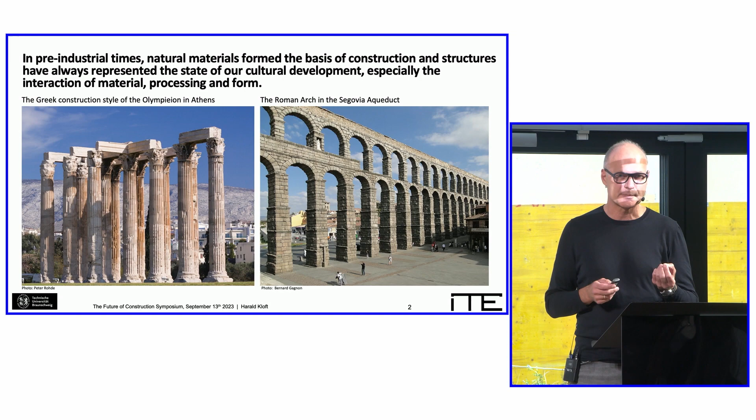So for me, it's always important not to step back, but to look back. And here you see two ancient buildings. In pre-industrial times, natural materials formed the basis for construction, and structures have always represented the state of our cultural development. So both buildings here represent, for their respective epoch, the unity of material, process, and form.

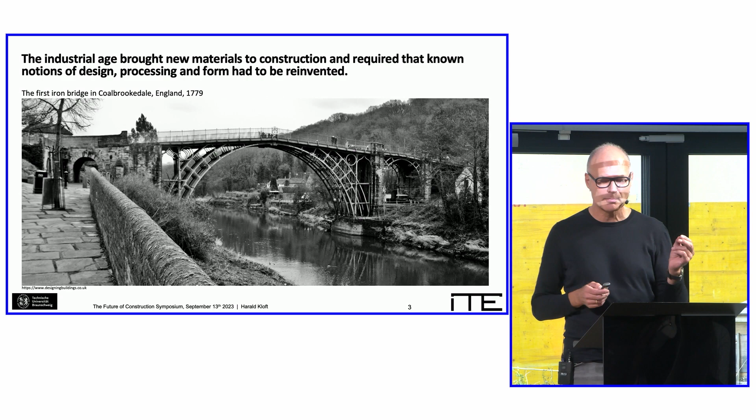And so this was for a long time, but then with industrialization we got new materials, and new materials also required that known notions of design, processing, and form had to be reinvented. Getting knowledge of material, process, and form is a process of development, as you see here with the first iron bridge in Coalbrookdale, whose form was still of a stone bridge, but without stones.

Infrastructure construction was then the birth of civil engineering, and the materials steel and concrete became the drivers of innovation in construction within the industrial age. Continuous research and development gradually resulted in formally impressive and structurally efficient concrete bridges, like here the Firth of Forth Bridge in Scotland, or the Salginatobel Bridge in Switzerland.

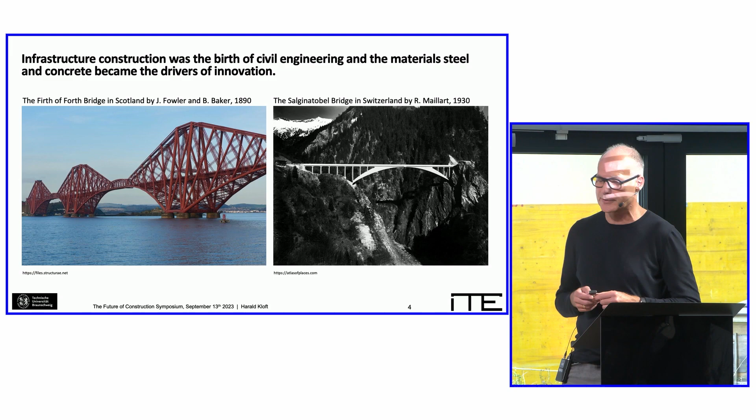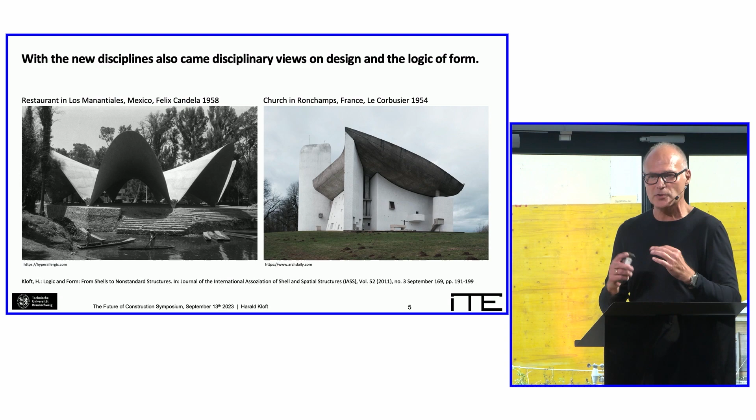With the new logic of form and with the new disciplines also came disciplinary views on design. Here you see two iconic buildings from the 1950s, from Le Corbusier and from Felix Candela. Both represent completely different ideas from the engineering and architectural point of view of how you design with concrete. One is a really efficient, minimized concrete structure. The other is much more coming from a spatial idea of how material could be arranged.

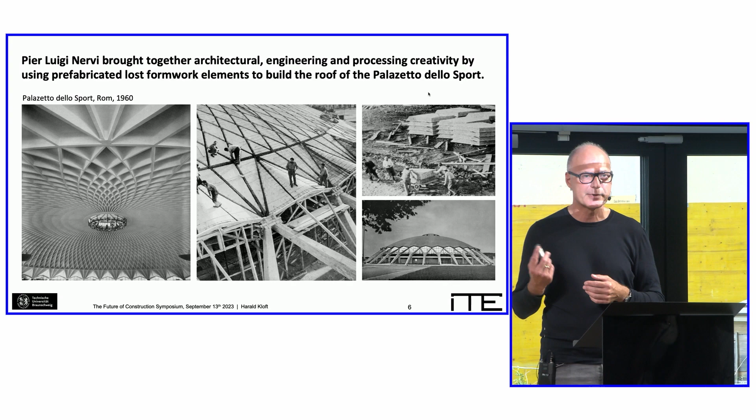Pier Luigi Nervi overcame disciplinary thinking and brought together architecture, engineering, and processing by using prefabricated lost formwork elements to build the roof of the Palazzetto dello Sport in just 30 days.

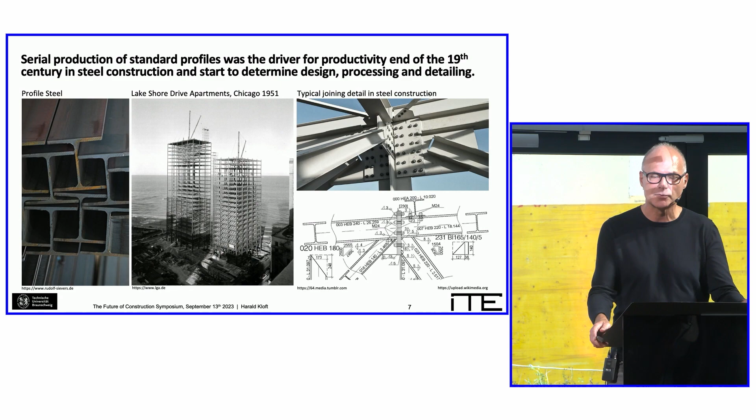Already at the end of the 19th century, in steel construction, the standardized series production of profiles started to determine the forms and construction methods, as well as the design and joining of the components, like you see here. As a consequence, steel design today is more geometric planning than material-efficient forming.

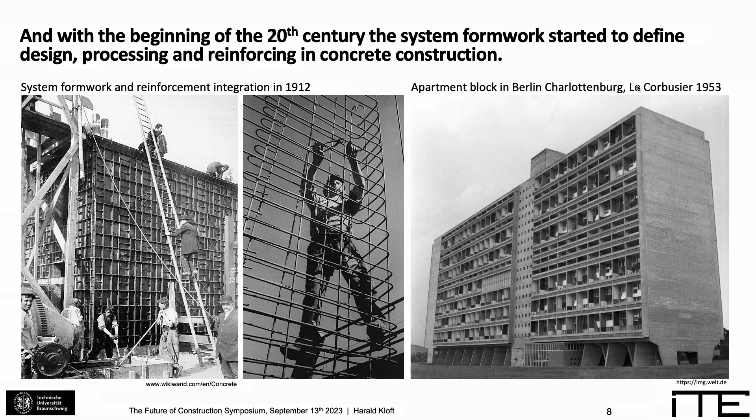And with the beginning of the 20th century, in concrete construction, the two-dimensional system formwork and the planar reinforcement grids started to limit the geometric form and material efficiency. So the resulting mass-intensive geometrical plane structures still shape our idea of concrete buildings today.

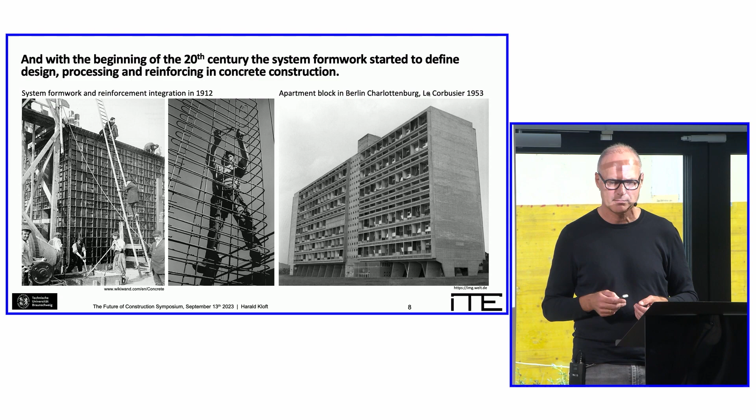As a result, industrialization has led to open material flows in construction, and is now a major contributor to today's environmental impact.

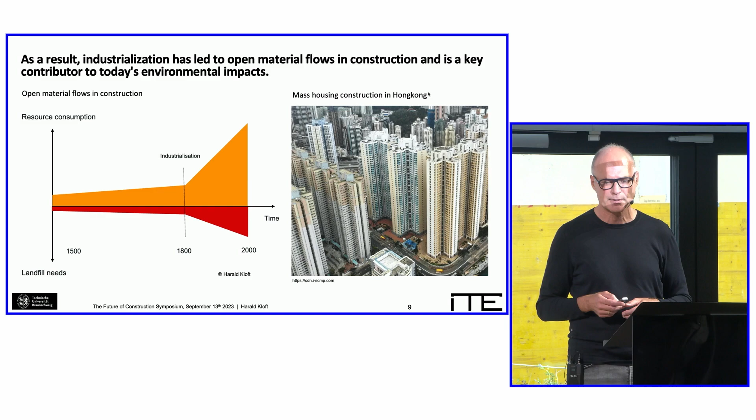Niklas Maak, a writer for the Frankfurter Allgemeine Sonntagszeitung, wrote an article about the paradox of building in times of climate change. He addresses the fact that the construction sector, as we heard before from the minister, is responsible for around 50% of the world's resource consumption and around 11% of CO2 emissions.

But we need to keep on going with construction, in building as well as infrastructure. So the question of the future is how we can build for more people with less material and fewer emissions. This is really dramatic, keep this always in your mind: just 80 years, coming from 2.5 billion to 8 billion people where we are now. 80 years.

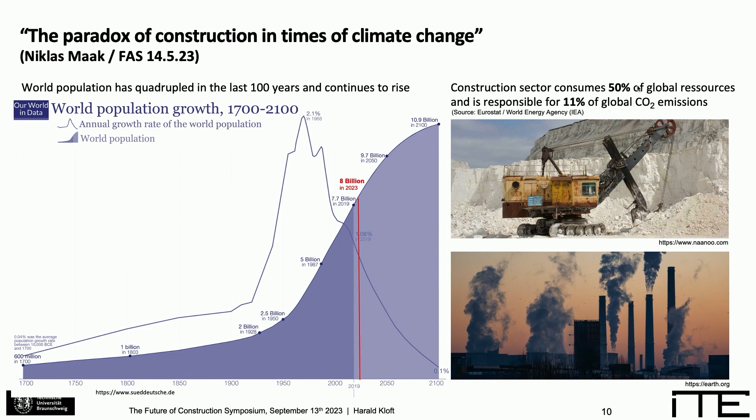At the transition from the industrial to the digital age, we need a new logic of form that is much more based on the convergence of material and manufacturing processes and uses the possibilities of digital tools, with the goal of circularity.

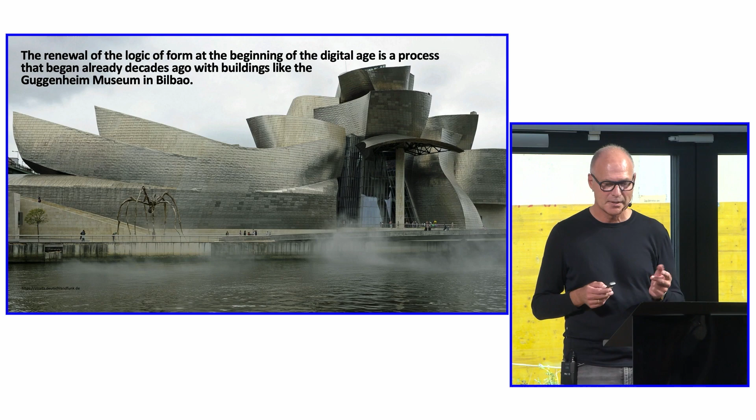So in my opinion, this renewal of the logic of form is itself a process, like at the beginning of the industrial age. And it already began decades ago with the realization of such fantastic buildings like the Guggenheim Museum in Bilbao.

Norman already mentioned that I had the luck at the turn of the millennium to be a project leader at the office of Bollinger & Grohmann and was involved in the realization of these unique freeform architectures. Our question at that time was always how do we get the industrial semi-finished products into those forms delivered by the architects. Digitalization was also at that time the key for this. But we were producing a lot of waste, and the processes were anything but economical.

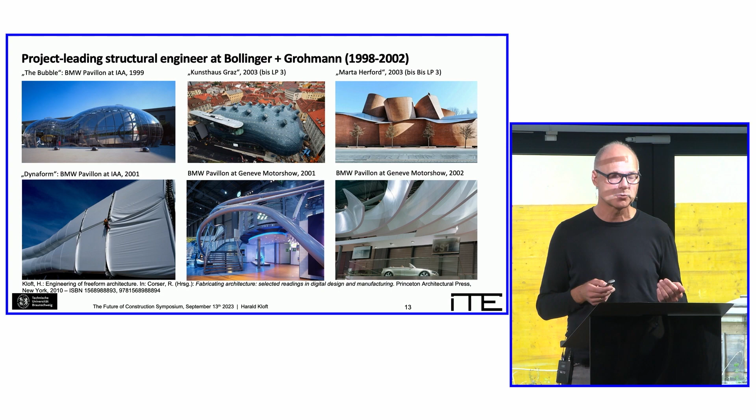But finally, they opened my door to digitalization, and that is the basis up to today of my knowledge. Where we have to go, I think what is really important is that in the digital age, we are clear that data are the key. Data are the basis for circularity, and they get controlled by software and hardware.

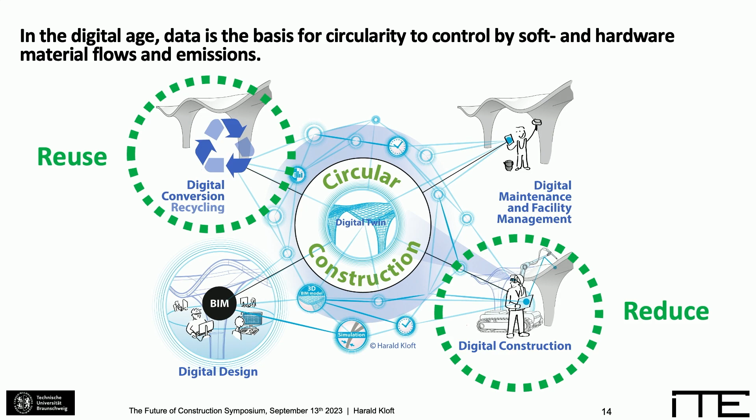And in the software area, there is already a lot of ongoing innovation. We heard about BIM, building information modeling, but also in facility management. So in design and facility management, there is a lot of ongoing things. But we lack really here on the construction side with our traditional technologies, and also in the question of how we deconstruct our buildings.

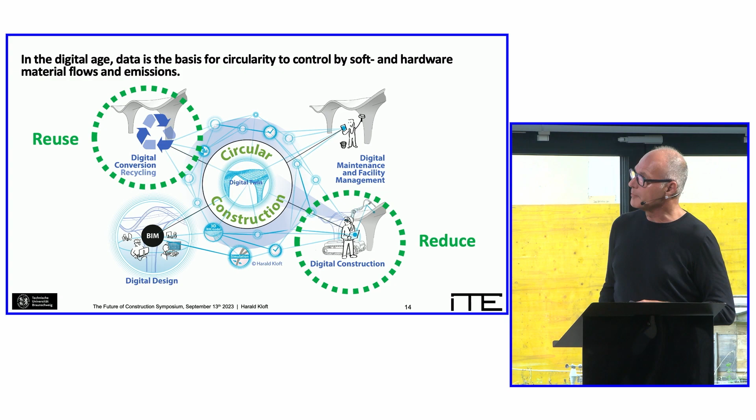There's less time now, just 15 minutes, so I will focus on a concept of how we have to build new, because I'm also convinced we have to build new. But it's also important how we reuse and recycle the materials we already have in the existing building stock.

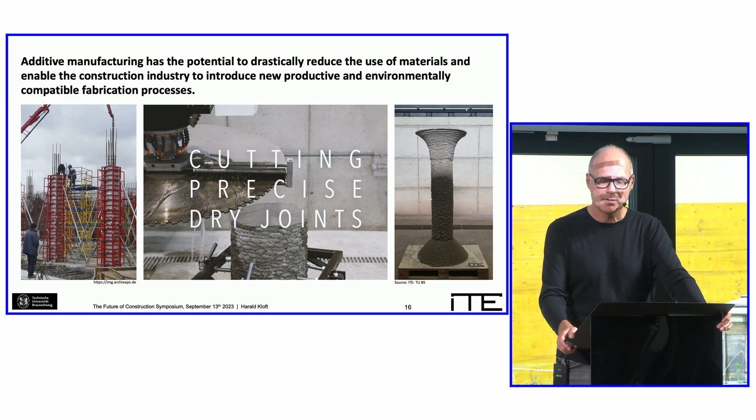So now, 20 years later, after this period of freeform architecture, in my opinion, the technology of additive manufacturing offers a paradigm shift in construction. Why? Because additive manufacturing is a layer-by-layer build-up of the components in a three-dimensional way.

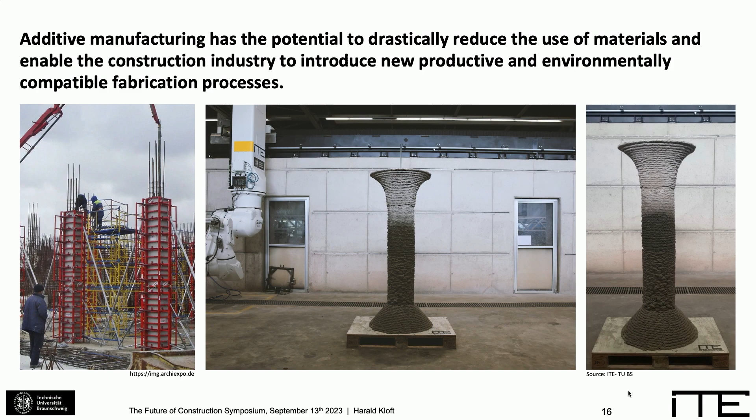So we don't need formwork, and also industrial pre-processes or complex adaptation of semi-finished products like we had in the freeform architectures are not required. So material and manufacturing process form a unit.

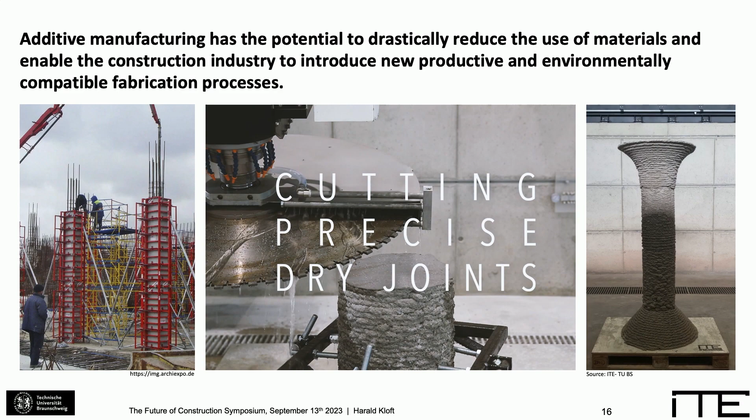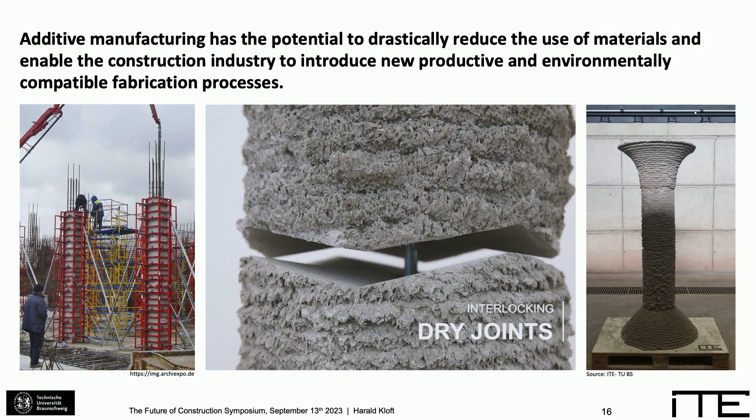And second, additive manufacturing processes are digitally controlled. That means they are enabled to get connected by data with design and facility management, so you can integrate this whole thinking on digitalization in a circular economy. And third, we have the freedom of form with additive manufacturing to create new scope for renewing the logic of form.

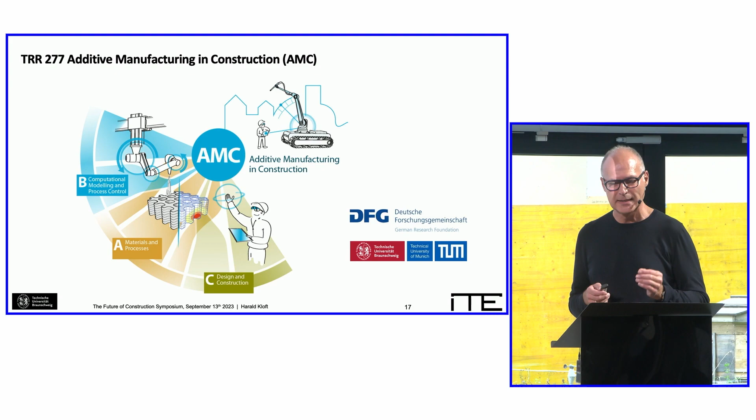TU Braunschweig and TU Munich already recognized the signs of the times at an early stage, and with the TRR 277, we started at the beginning of 2020 to fundamentally research the technology of additive manufacturing in construction across materials and processes.

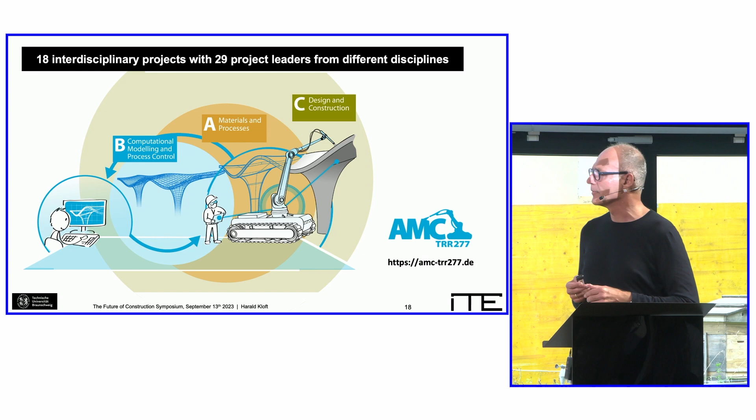29 project leaders are researching the relationship between material, processes, and form in 18 projects. All individual projects are very experimental in their methodology and require highly interdisciplinary collaboration between scientists from civil engineering, mechanical engineering, and also architecture.

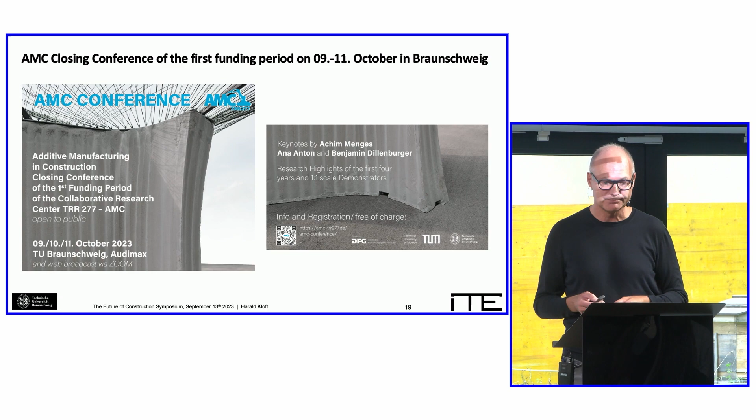Maybe we can reduce the noise a little bit, sorry.

So there is not enough time to go into all the activities in the TRR, but I'd like to present some of the things, especially those we do at the ITE.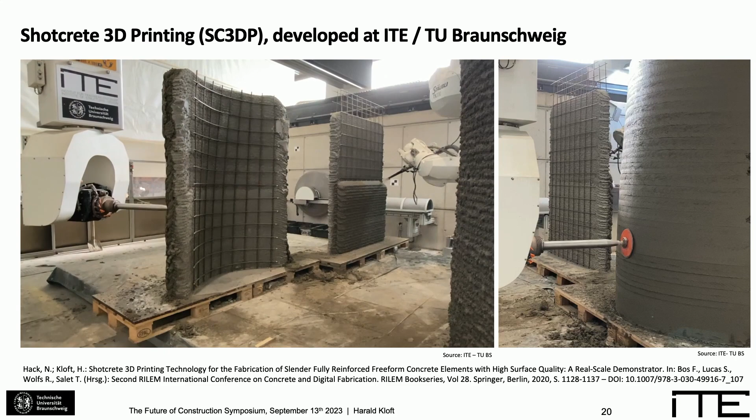So since 2016, we are continuously developing the so-called shotcrete 3D printing method, a deposition method where the matrix is accelerated just before the nozzle by adding compressed air and admixtures. This two-component process creates a very good bond across the layers and enables the imprinting, like you see here, of the reinforcement.

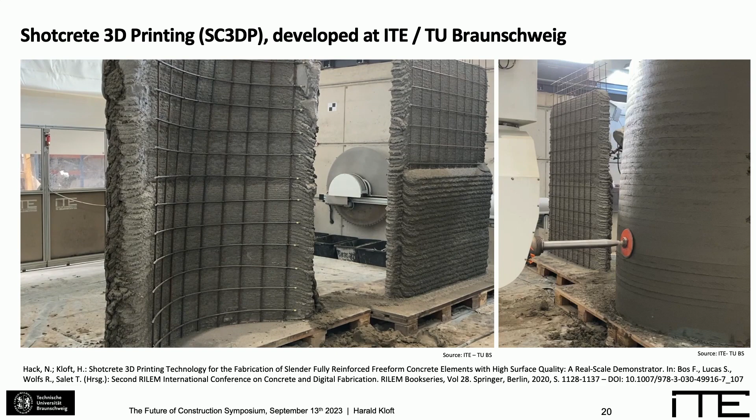Here you can see some of the form-optimized components in a one-to-one scale, which we have manufactured with a degree of freedom of the robotic facility. You will find them also well published.

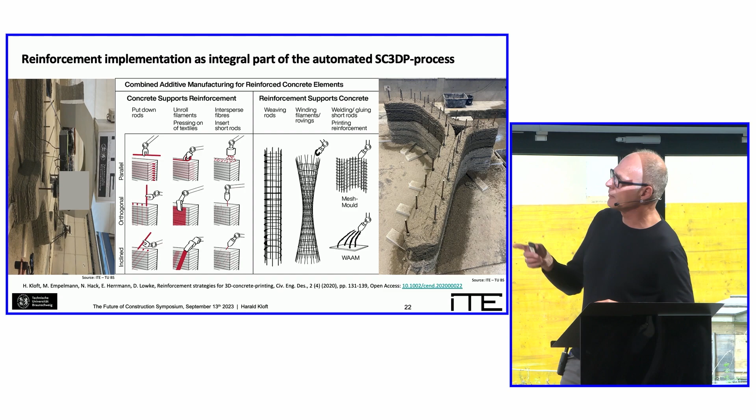One crucial point for the efficiency of load-bearing components is, of course, reinforcement integration. Here, through combined automated processes of 3D printing and reinforcement integration, completely new strategies are possible, like you see here.

Maybe if you turn your head, you can see the insertion of short rebars.

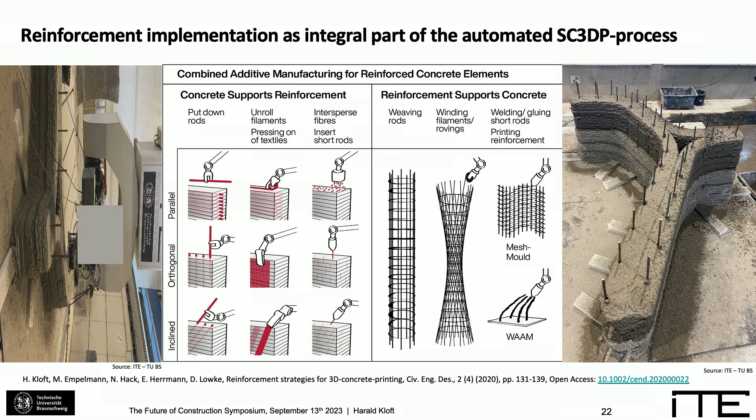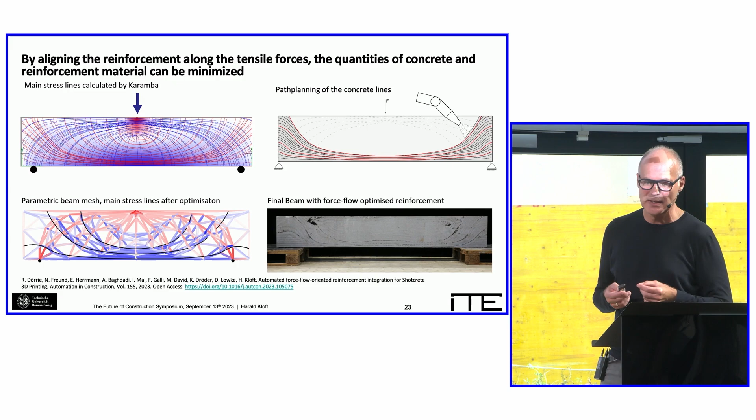The efficiency from an engineering point of view lies in the merging of design and manufacturing as an interactive process. Here you can see the possibility of arranging the reinforcement along the tensile force lines by matching the concrete paths to the reinforcement integration.

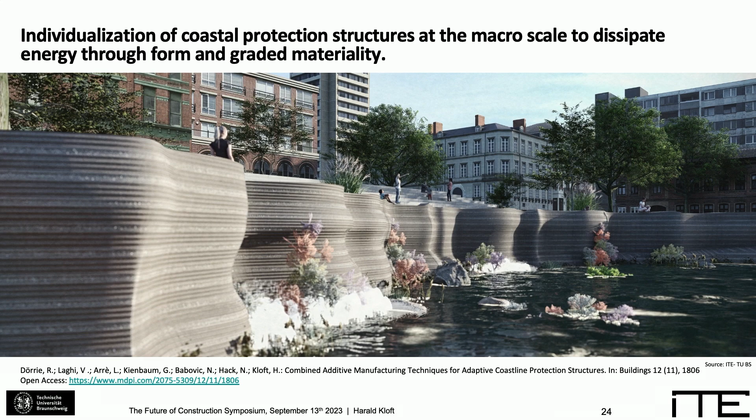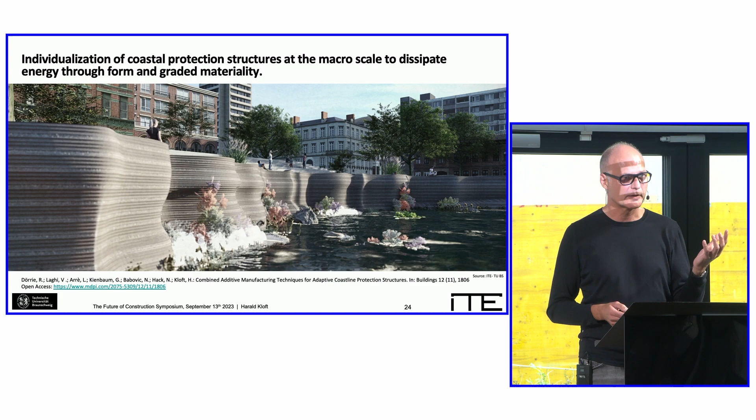But for us it is very important not just to focus on small details in fundamental research. It's also important to look for applications where a new logic of form is ideally suited. We can of course 3D print houses, but 3D printed houses are not, in terms of what 3D printing can do, a new logic of form. So this is what we have to really aim for.

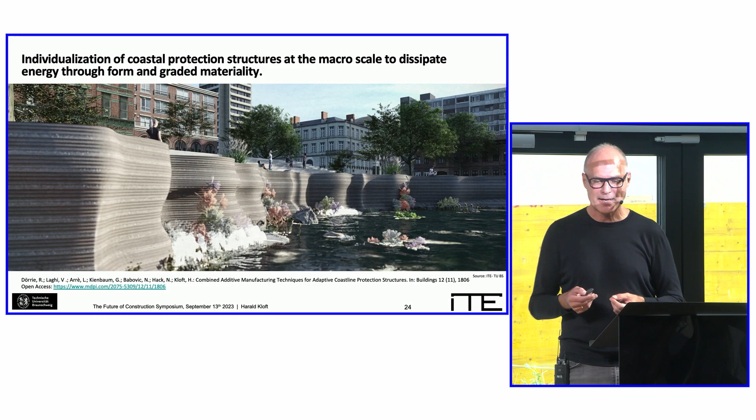For example, in coastal protection, highly individualized shaping and material grading can be based on local conditions and wave dynamics to dissipate energy, not just working as resistance by putting masses there, like we do now. So this is a mind gap in thinking.

Also, 3D printing with concrete does not mean by itself just thinking in terms of areas and volumes. At TU Braunschweig, together the ITE with iBMB, Dirk Lowke, we have recently also developed a completely new 3D printing process for concrete, where we put the matrix into a fluid in a dimensionally stable manner, making particularly filigrane concrete possible. The lightweight bridge shown here on the left, also in cooperation with Pierluigi D'Acunto and Ole Ohlbrock, gives the first impression of our research on the merging of material, process and ingenious design. It's now exhibited at the Biennale in Venice.

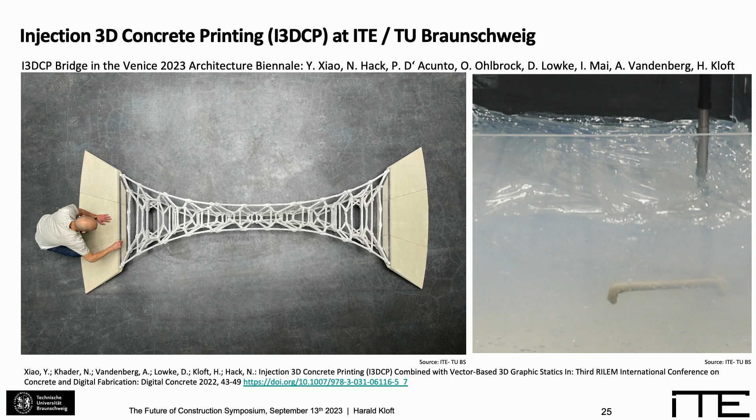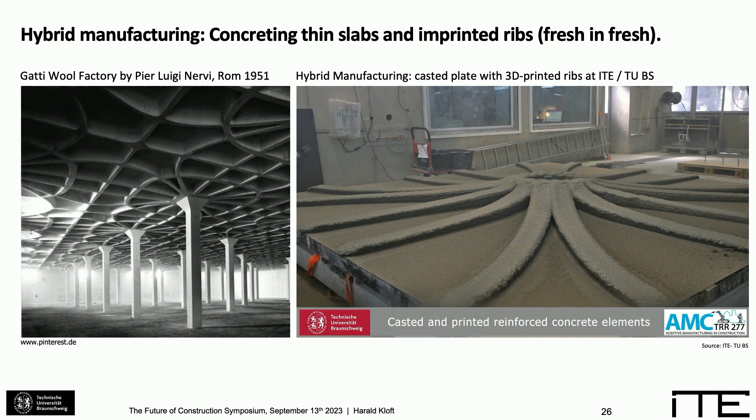Our idea of integrating AMC is not simply to replace traditional manufacturing. It is also about combining the advantages of serial production and additive manufacturing in hybrid manufacturing processes. Here you see an 8 centimeter thick slab, which is concreted, and on top printed fresh ribs. If you compare the masses with the standard, normally what we build today, a 30 centimeter thick flat slab, you can save 60% of the concrete mass, just by rethinking what we are doing and trying to find new ideas to make structures efficient.

The same you can do in steel construction. Here we are exploring hybrid fabrication for structural steelwork by locally strengthening the standard profiles. This gives us the opportunity to select profiles not according to a local maximum stressed area like we do now, but to select a baseline profile design and locally strengthen in a highly stressed area.

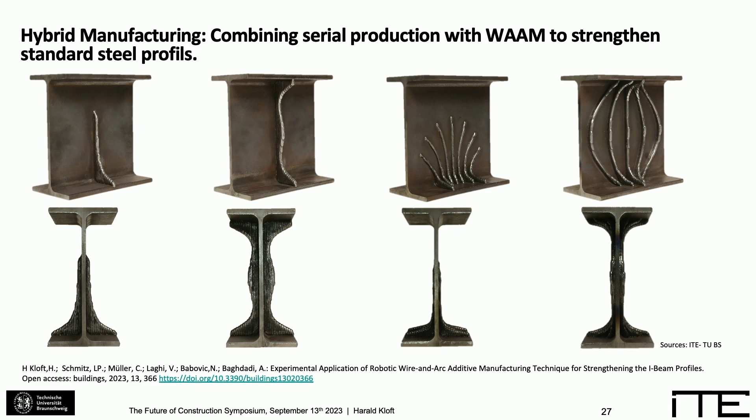Finally, if you drastically want to reduce the environmental impact of the material, and you use renewable natural sources like earth material, then you don't need to start an ambitious form finding process. This doesn't mean you don't need form finding at all, so it's also depending on the material.

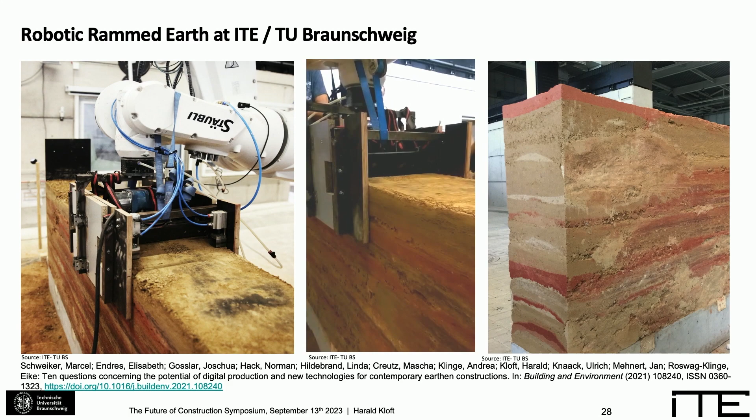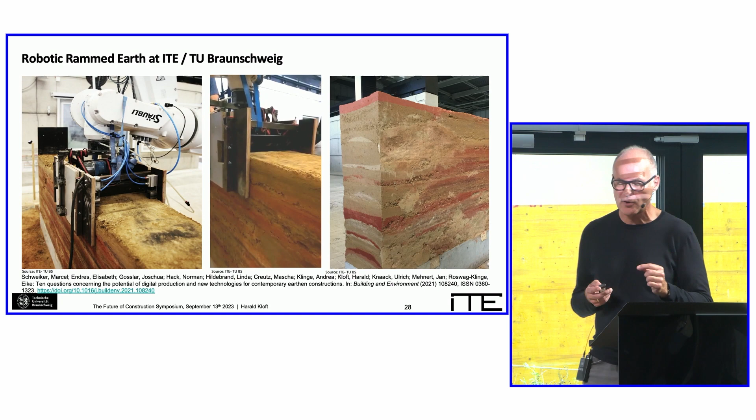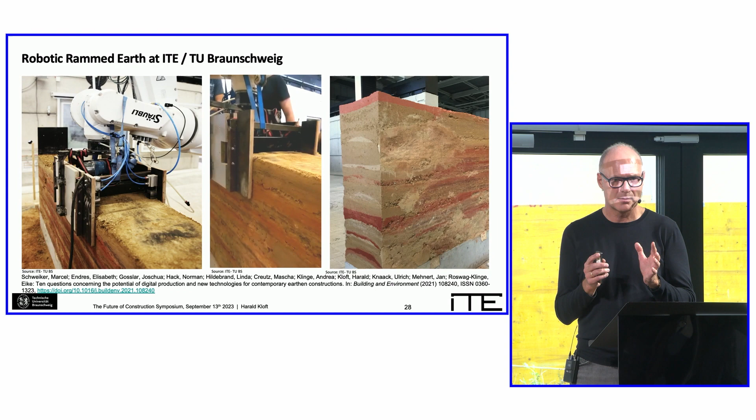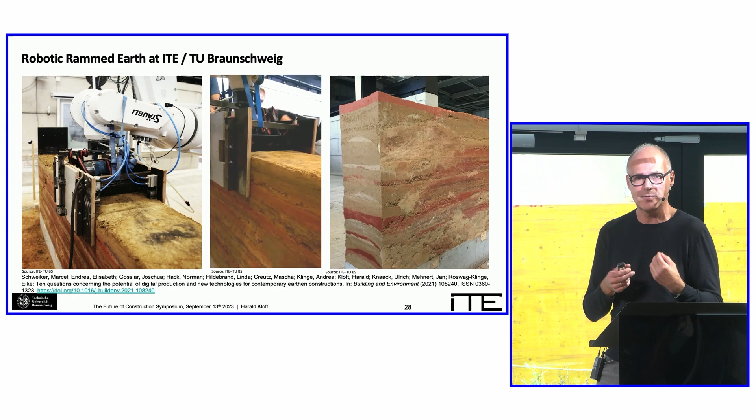And here we have developed robotic rammed earth. Here it's much more important to reduce transportation distances and work on site, and with our robotic technique we are able to work on site. By combining ramming and forming in one process, this is what's really new about this technology, we have just one process step for both parts of rammed earth. And this is highly economical as well as environmentally friendly. So this is the future, that we not just focus on one aspect, environmental impact alone. We also have to be economical, and with the right technologies, both is possible.

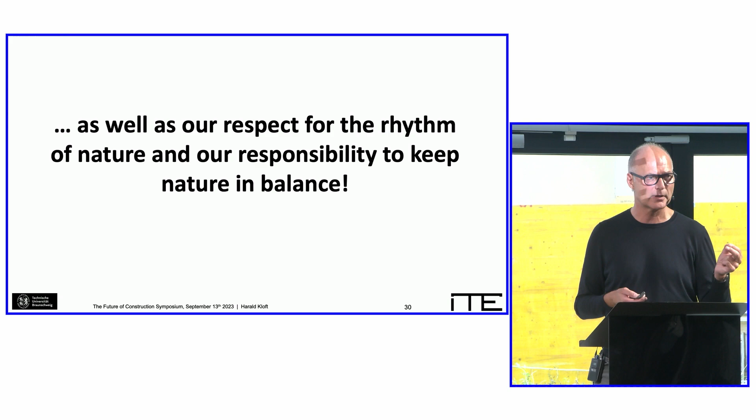In summary, I would like to state that digital tools are the drivers to renew the logic of form, but the basis is our architectural and engineering creativity. In the future, we have to come together again as a team and not as separate disciplines. And what is also important is that we respect the rhythm of nature, its 24 hour and 365 day cycles. We are too fast for the rhythm of nature actually, and it's our responsibility to keep nature in balance. Thank you very much for your attention.